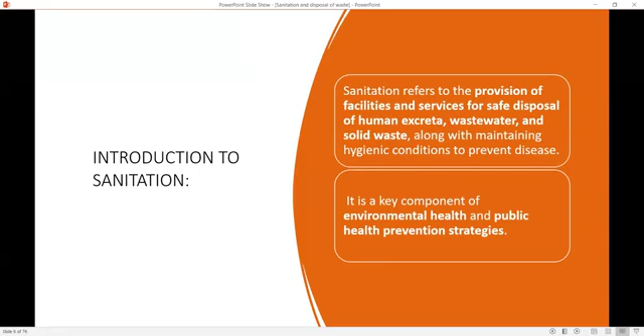Introduction to sanitation. Sanitation refers to the provision of facilities and services for safe disposal of human excreta, wastewater, and solid waste, along with maintaining hygienic conditions to prevent diseases. It is a key component of environmental health and public health prevention strategies.

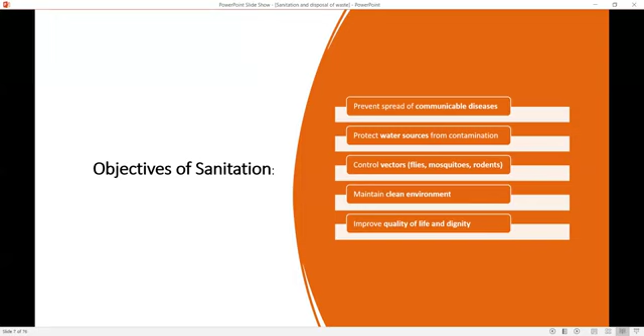Objectives: prevent spread of communicable diseases, protect water source from contamination, control vectors like flies, mosquitoes, rodents, maintain clean environment, and improve quality of life and dignity.

Next is solid waste and definition. Solid waste refers to any unwanted product in our environment or from our daily items that is not a liquid or a gas. Solid waste, on improper disposal, affects the environment in many ways, such as pollution in air, water, soil, and blocking water drains.

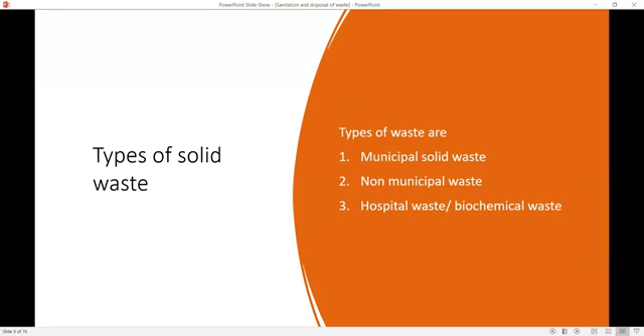It can spread disease like dysentery, cholera, and vector-borne diseases such as malaria and dengue. Types of solid waste are municipal solid waste, non-municipal solid waste, and hospital waste or biochemical waste.

Municipal solid waste includes all the items from the home and business that people no longer have any use for. These wastes are commonly called trash or garbage and include items such as food, paper, plastic, textile, leather, wood, glass, metal, sanitary waste in septic tank, and other wastes.

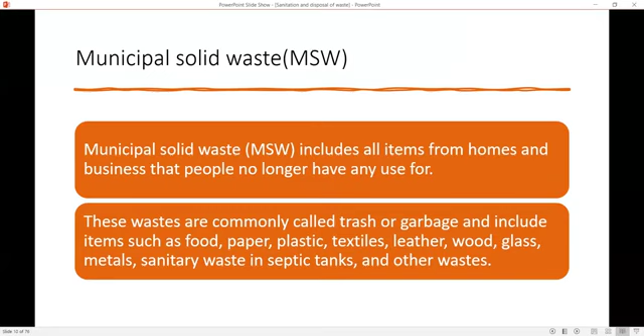Municipal solid waste includes street waste, sanitation waste, construction and demolition debris, agriculture waste, institutional and commercial waste, and household waste. So the composition of municipal solid waste includes metal, which is 9.5%,

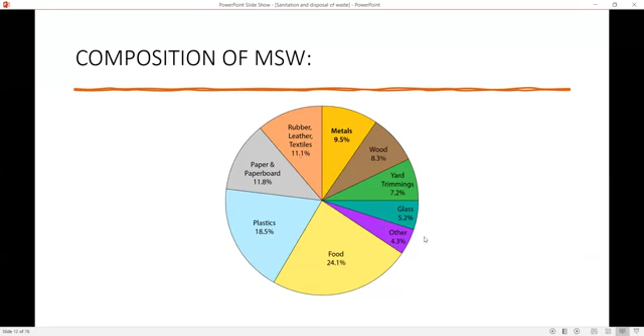wood 8.3%, yard trimming 7.2%, glass 5.2%, food 24.1%, plastic 18.5%, paper and paperboard 11.8%, rubber/leather/textile 11.1%, and others 4.3%. Next is non-municipal solid waste.

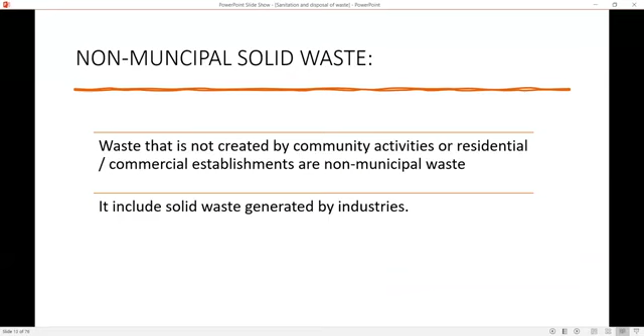Waste that is not created by community activities or residential/commercial establishments is non-municipal waste. It includes solid waste generated by industries.

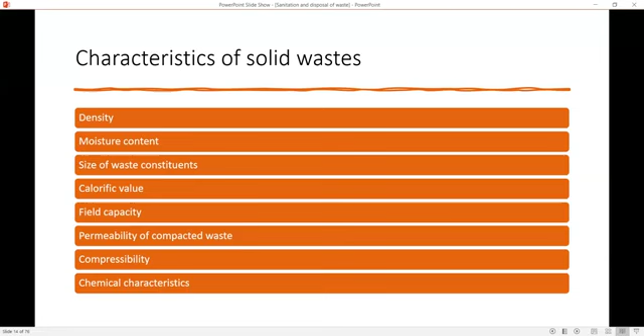Next are the characteristics of solid waste, which are density, moisture content, size of waste constituents, calorific value, field capacity, permeability of compacted waste, compressibility, and chemical characteristics.

Next is hospital waste or biochemical waste. Hospital waste is generated during the diagnosis, treatment, and immunization of human beings or animals. It includes waste like sharps, soiled waste, disposables, discarded medicine, and chemical waste.

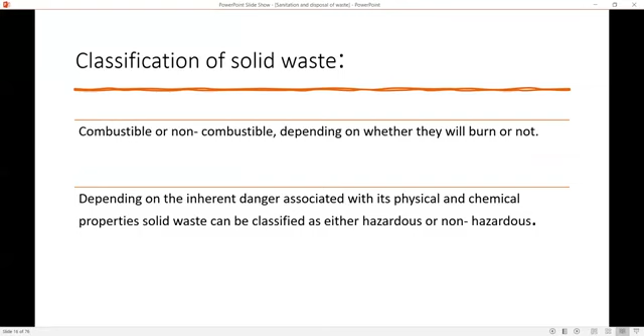Next is the classification of solid waste, which is combustible or non-combustible, depending on whether they are burned or not. Depending on the inherent danger associated with its physical and chemical properties, solid waste can also be classified as either hazardous or non-hazardous. Next are the methods of waste disposal, which are landfill, incineration, waste compaction, biogas generation, composting, and vermicomposting.

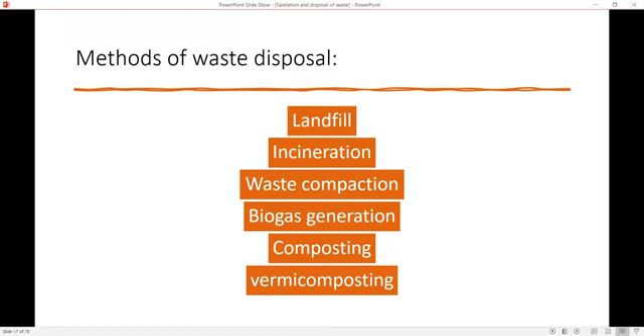This is a diagram showing the different methods. Composting is 5.5%, incineration 11.1%, controlled landfill 3.7%, landfill is 25.2%, sanitary landfill is 7.7%, open dump 33%, recycling 13.5%.

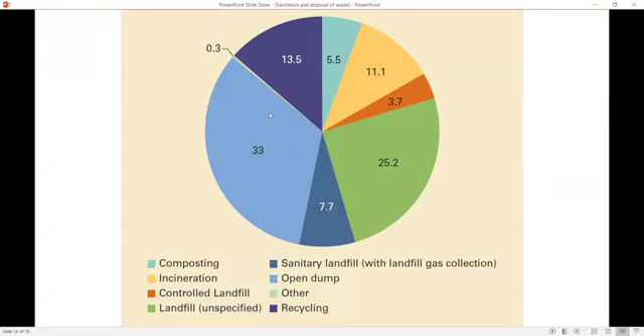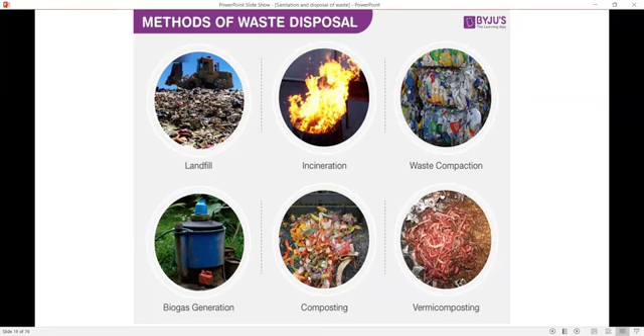So these are the methods: landfill, incineration, waste compaction, biogas generation, composting, and vermicomposting. So we will discuss this one by one.

First is landfill. In this process, the waste that cannot be reused or recycled is separated out and spread as a thin layer in the low-lying areas across the city. A layer of soil is added after each layer of garbage.

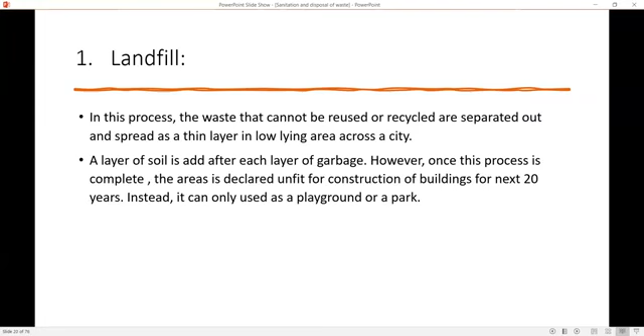However, once this process is complete, the area is declared unfit for construction of building for the next 20 years. Instead, it can only be used as a playground or a park.

Second is incineration. It involves controlled combustion of waste at a high temperature, converting waste into ash, gases, and heat, significantly reducing volume and weight. It is particularly useful for infectious waste, hospital waste, and hazardous material.

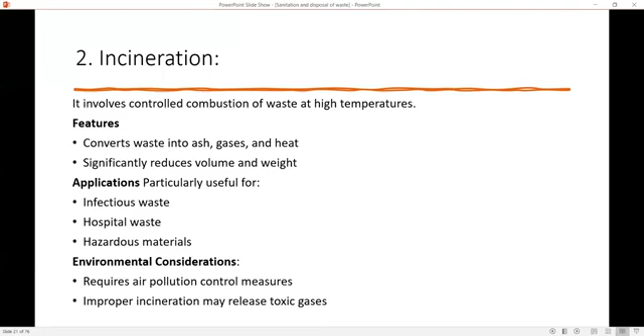Environmental considerations require air pollution control measures. Improper incineration may cause release of toxic gases. This process reduces the volume of waste by 90% and is considered one of the most hygienic methods of waste disposal.

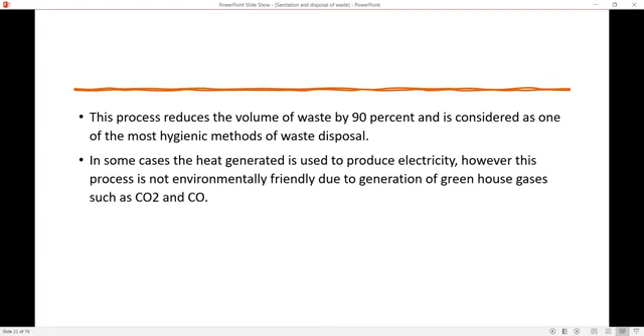In some cases, the heat generated is used to produce electricity. However, this process is not environmentally friendly due to the generation of greenhouse gases such as carbon dioxide and carbon monoxide. Next is waste compaction.

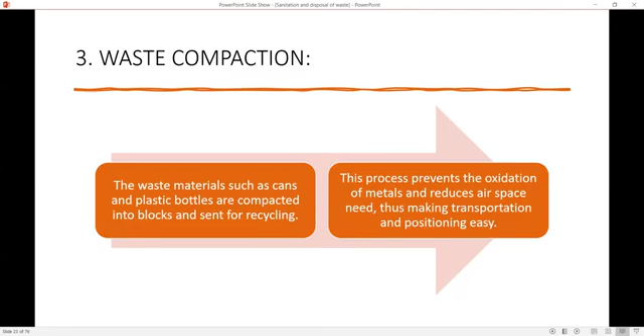Waste materials such as cans and plastic bottles are compacted into blocks and sent for recycling. This process prevents the oxidation of metals and reduces airspace needed, thus making transportation and positioning easy.

Number four is biogas generation. Biodegradable waste is the type of waste originating from plant and animal sources, which may be degraded by other living organisms.

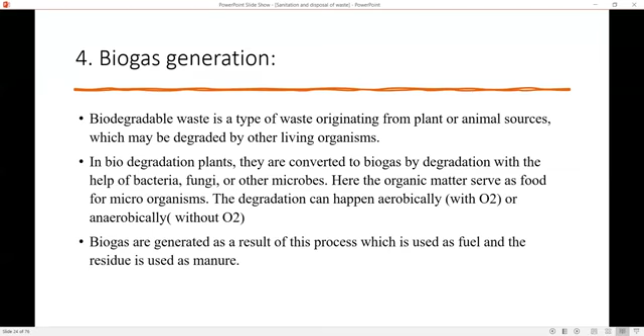In biodegradation plants, waste is converted into biogas through degradation with the help of bacteria, fungi, and other microbes. Here, organic matter serves as food for microorganisms. The degradation can happen aerobically, with oxygen, or anaerobically, without oxygen. Biogas is generated as a result of the process, which is used as fuel, and the residue is used as manure.

Next is composting. Composting is a natural process of rotting or decomposition of organic matter by microorganisms under controlled conditions. Raw organic materials such as crop residue, animal waste, food garbage, some municipal waste, and suitable industrial waste enhance its suitability for application to soil as a fertilizing resource after undergoing composting.

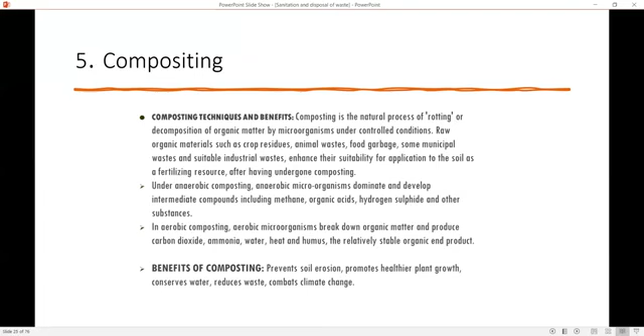Under anaerobic composting, anaerobic microorganisms dominate and develop intermediate compounds including methane, organic acid, hydrogen sulfide, and other substances. In aerobic composting, aerobic microorganisms break down organic matter and produce carbon dioxide, ammonia, water, heat, humus, and other stable organic end products. The benefits of composting are preventing soil erosion, promoting healthier plant growth, conserving water, reducing waste, and combating climate change.

Next is vermicomposting. Vermicomposting is the process of using worms for degradation of organic matter into nutrient-rich manure. Worms consume and digest the organic matter. The byproduct of the digestion, which is excreted out of the worm, makes the soil nutrient-rich, thus enhancing the growth of fungus and bacteria. It is also far more effective than traditional composting.

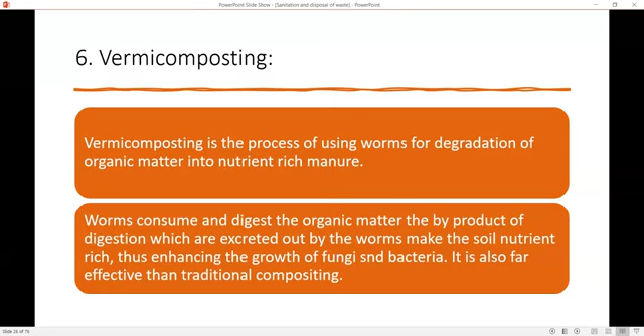Next is solid waste management. The term solid waste management mainly refers to the complete process of collecting, treating, and disposing of solid waste. In the waste management process, waste is collected from different sources and disposed of. This process includes collection, transportation, treatment, analysis, and disposal of waste.

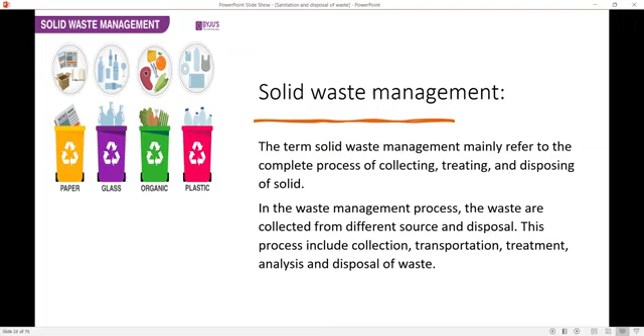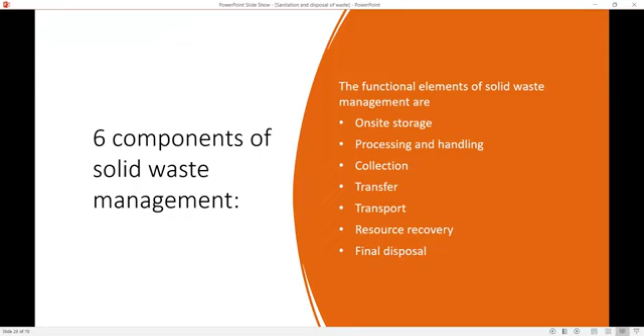Next are the components of solid waste management. The functional elements of solid waste management are on-site storage, processing and handling, collection, transfer, transportation, resource recovery, and final disposal. This image shows the process: collection, transportation, and then recovery, processing, and disposal.

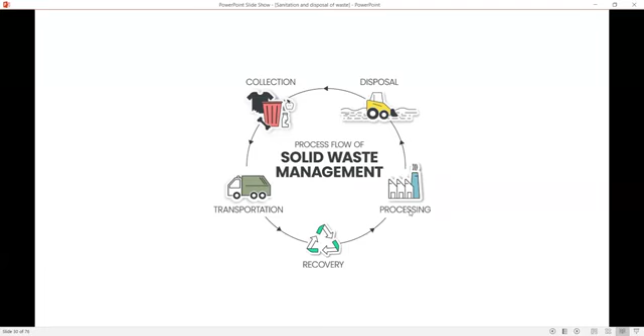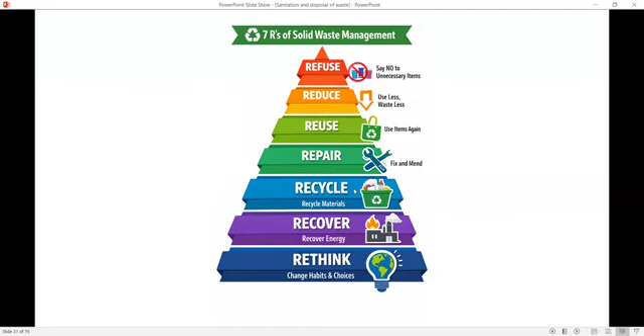The 7 R's of solid waste management are: refuse - say no to unnecessary items; reduce - use less, waste less; reuse - use items again; repair - fix and mend; recycle - recycle materials; recover; and rethink.

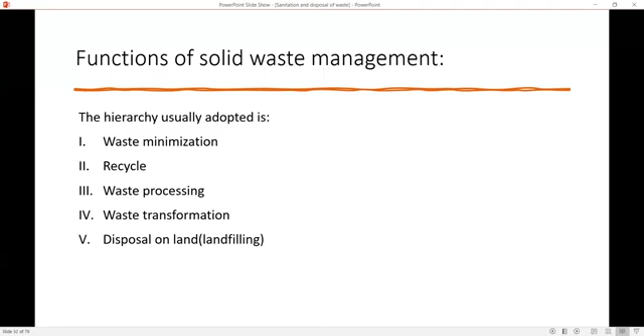Next is integrated solid waste management. Integrated solid waste management is a comprehensive framework that manages municipal solid waste by combining source reduction, recycling, composting, and safe disposal to maximize efficiency and minimize environmental impact. It promotes sustainability by prioritizing waste prevention, resource recovery, and reduction of pollutants.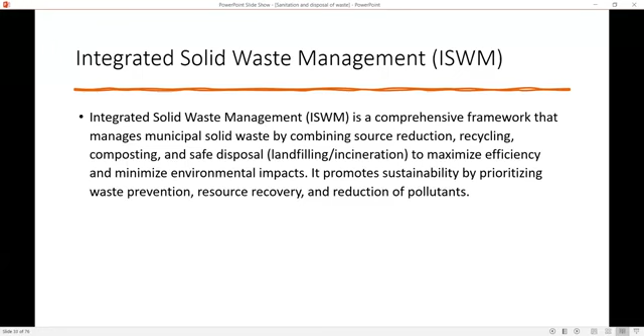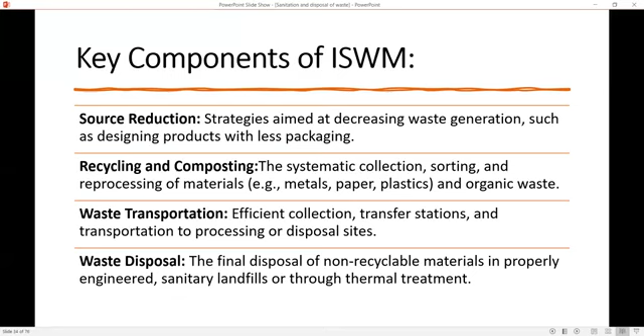The key components of integrated waste management are: strategies aimed at decreasing waste generation, such as designing products with less packaging, recycling and composting; systematic collection, sorting, and reprocessing of materials, for example metal, paper, plastic, and organic waste; waste transportation, which is efficient collection and transportation to processing or disposal sites; and waste disposal, the final disposal of non-recyclable material in a properly engineered sanitary landfill or through thermal treatment.

Challenges include lack of infrastructure, lack of human resources, insufficient budget for solid waste management, limitation of technology, lack of participation in waste segregation at the source due to low awareness, low waste collection fee, and institutional and policy issues for solid waste management. Lack of infrastructure includes inadequate sewerage systems in rural and peri-urban areas, absence of proper drainage network, poorly constructed and non-functional toilets, and limited wastewater treatment plants.

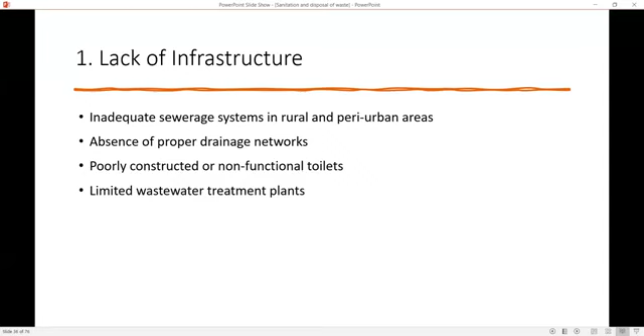Open defecation practices are still common in rural communities due to poverty, cultural habits, and lack of toilets, leading to contamination of soil and water, which is a major barrier to achieving SDG 6.

Financial constraints include high cost of building sanitation systems, limited government budget allocation, low household income for toilet construction, and dependence on external funding such as NGOs.

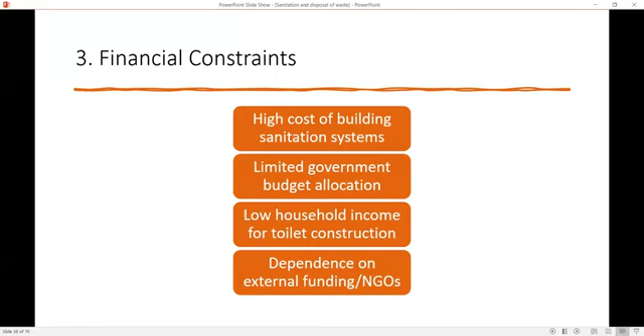Poor waste management system: irregular garbage collection, open dumping of solid waste, lack of segregation of biomedical, domestic and industrial waste, and burning of waste causing air pollution.

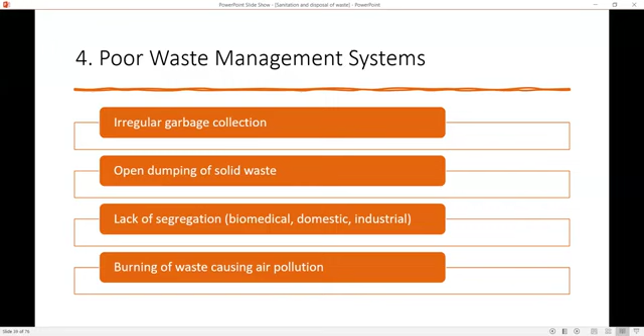Water contamination: mixing of sewage with drinking water, pipeline leakage at old pipes, and unsafe disposal of wastewater leads to outbreaks of diarrhea, typhoid, and hepatitis A.

Population growth and urbanization: rapid urbanization, migration, overcrowding, slums, overburdened municipal systems, and unplanned settlements without sanitation services. Lack of awareness and education includes poor understanding of hygiene practices, low hand washing compliance, misconceptions about disease transmission, and weak health education programs.

Weak governance and policy implementation, poor enforcement of sanitation law, corruption and mismanagement of funds, lack of coordination between departments, and inefficient monitoring systems are key challenges. Next is the cultural and behavioral barriers, which include resistance to toilet use in some communities, gender-based restrictions in accessing sanitation facilities, and social acceptance of open defecation in certain areas.

Environmental challenges include flood damage to sanitation systems, climate change increasing contamination risk, groundwater pollution, and poor drainage causing stagnant water.

Solid waste management is essential for achieving the Sustainable Development Goals, including SDG 11, sustainable cities and communities, which focuses on reducing the environmental impact of waste generation in urban areas, ensuring cities are sustainable, resilient, and clean. SDG 12, responsible consumption and production, aims to sustainably reduce waste generation by 2030 through prevention, reduction, recycling, and reuse.

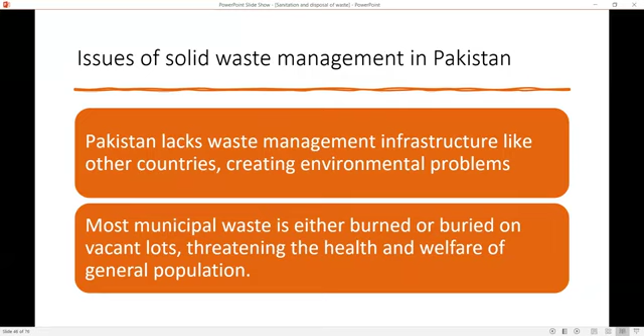Issues of solid waste management in Pakistan: Pakistan lacks waste management infrastructure like other countries, creating environmental problems. Most municipal waste is either burned or buried on vacant lots, threatening the life, health, and welfare of the general population. This is a diagram showing the solid waste management situation in the urban areas of Pakistan.

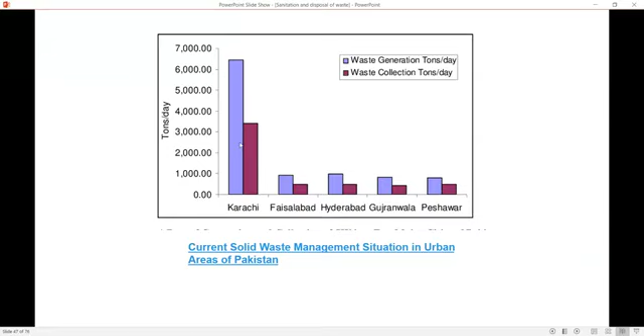This purple line shows waste generation, and this shows waste collection, which is less than waste generation, for Karachi, Faisalabad, Hyderabad, Gujranwala, and Peshawar.

Strategies for reducing greenhouse gas emissions from municipal solid waste management in Pakistan.

Next is Chief Minister Maryam Nawaz Sharif. Her Suthra Punjab, Clean Punjab initiative marks Pakistan's largest province-wide sanitation and waste management program. It presents a significant step toward environmental sustainability and public health improvement in Punjab. The campaign aimed to achieve zero waste in Punjab within 3 months, encompassing both urban and rural areas.

The impact of Suthra Punjab includes cleaner streets, cities, towns and villages, restoration of public gathering spaces, improved air quality, healthier living conditions, enhanced living standards, positive impact on tourism, and generation of employment opportunities.

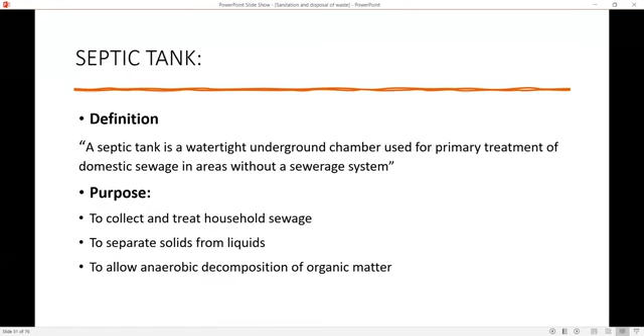Next is the septic tank. A septic tank is a watertight underground chamber used for the primary treatment of domestic sewage in areas without a sewerage system. Its purpose is to collect and treat household sewage, to separate solids from the liquid, and to allow anaerobic decomposition of organic matter.

The structure of the septic tank includes an inlet pipe which brings sewage into the tank chamber where treatment occurs. A partition wall divides the tank into two compartments. An outlet pipe carries the effluent out. A vent pipe releases gases like methane and H2S, and a manhole allows for cleaning and inspection.

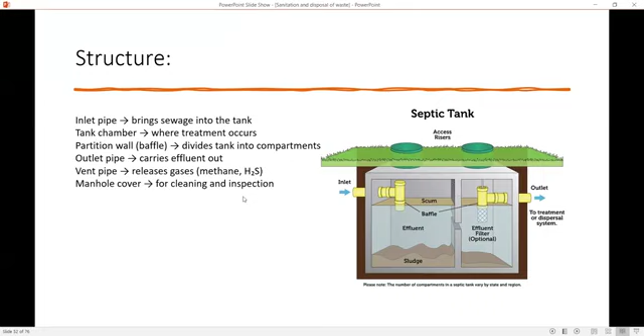The common types of septic systems are gravity, pressure distribution, sand filter, and mound system.

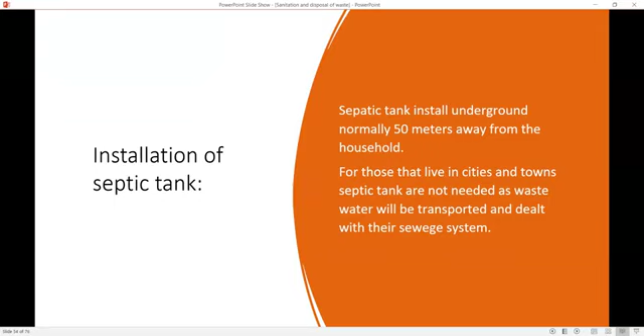Installation of septic tank: septic tanks are installed underground, normally some distance away from the household. For those living in cities and towns, septic tanks are not needed as the wastewater will be transported and dealt with by their sewage system.

The functioning of the septic tank: step one is sedimentation, where heavy solids settle at the bottom, called sludge, while light material like oil and grease float, called scum. Second step is anaerobic digestion, in which bacteria break down organic matter and produce gases like methane, carbon dioxide, and H2S. Third step is effluent discharge, where partially treated liquid flows out and goes to a soak pit and drain field for further purification.

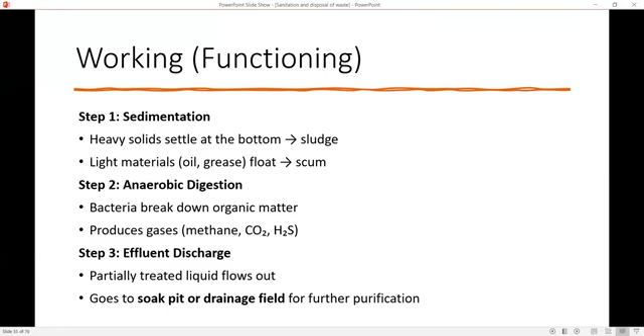Layers in the septic tank: the top layer is the scum, the middle layer is the clear liquid effluent, and the bottom is the sludge layer.

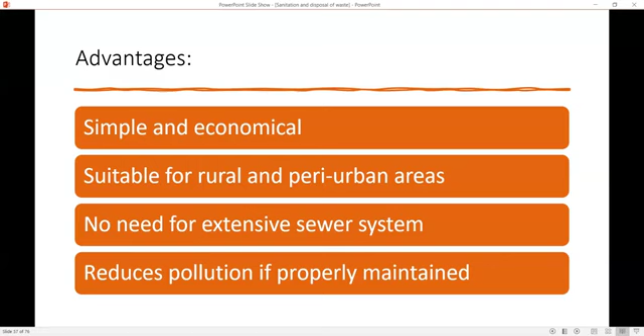Advantages of the septic tank: it is simple and economical, suitable for rural and peri-urban areas, requires no extensive sewer system, and reduces pollution if properly maintained.

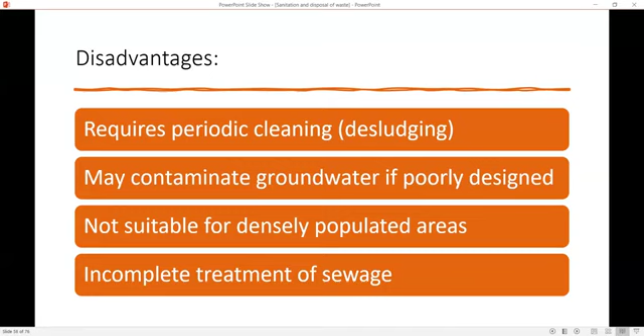The disadvantages of septic tanks are that they require regular cleaning, may contaminate groundwater if poorly designed, are not suitable for densely populated areas, and provide incomplete treatment of sewage. Maintenance requires regular desludging every 2 to 3 years, avoiding disposal of non-biodegradable waste, and ensuring proper ventilation.

Recent updates: the solid waste management sector in Pakistan has a refined roadmap for policymakers. Pakistan could strengthen its solid waste management and, in doing so, reduce its greenhouse gas emissions. It provides guidance on improving and expanding waste collection and disposal services for municipal, industrial, electronic, and hospital waste.

It outlined the waste management options and key considerations in setting up a waste management system.

Next is the National Waste Management Strategy. Pakistan does not yet have a single unified solid waste policy, but waste management is guided by the National Hazardous Waste Policy 2022, National Environmental Policy, National Sanitation Policy, and Provincial Waste Management Rules. The 2022 policy acts as the umbrella framework for waste management, especially hazardous waste. Objectives of the national strategy include prevention, reduction of waste generation, environmentally safe handling and disposal, protection of public health and environment, and compliance with international conventions.

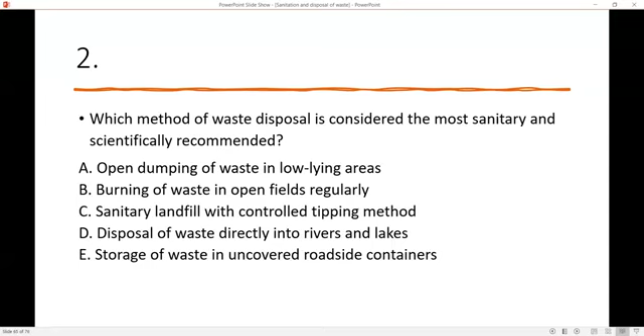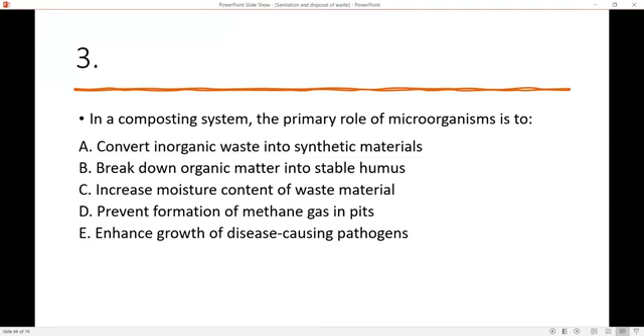B. Yes, B is the right option.

MCQ number four. Which of the following waste disposal methods is most suitable for infectious hospital waste? A. Open dumping in municipal landfill areas. B. Composting with domestic biodegradable waste. C. Controlled incineration at high temperature. D. Disposal into the sewage system without treatment. E. Burial in a shallow pit near residential areas.

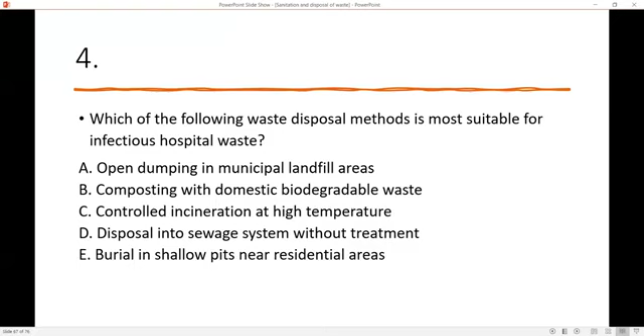C. Yes, C is the right option. Controlled incineration at high temperature.

MCQ number five. Which of the following is not a function of solid waste management? A. Collection of waste from various sources regularly. B. Segregation of waste into different categories. C. Transportation of waste to disposal safely. D. Promotion of open dumping for quick disposal. E. Treatment and final disposal of waste scientifically.

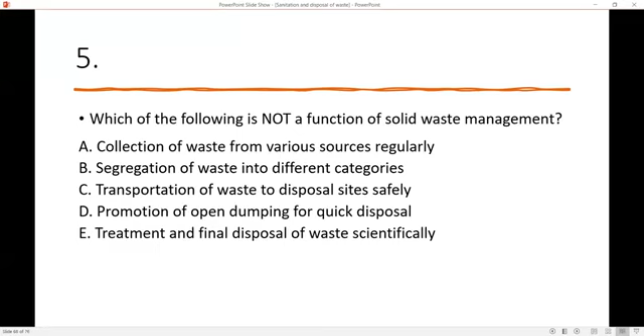D. Yes, D is the right option.

MCQ number six. A rural village reports frequent diarrheal outbreaks. Investigation shows waste is dumped near a shallow well used for drinking water. The most appropriate intervention is: A. Promote open burning of waste near the water source. B. Shift waste disposal to a sanitary landfill away from the well. C. Increase use of chemical fertilizer in agriculture. D. Encourage storage of waste inside the household longer. E. Discharge liquid waste directly into the same well.

B. Yes, B is the right option.

MCQ number seven. A septic tank is not desludged for many years. The most likely consequence is: A. Increased efficiency of anaerobic digestion process. B. Overflow of untreated sewage into the surroundings. C. Complete sterilization of pathogens inside the tank. D. Conversion of sludge into high quality compost. E. Reduction in gas production due to inactivity.

B. Yes, B is the right option.

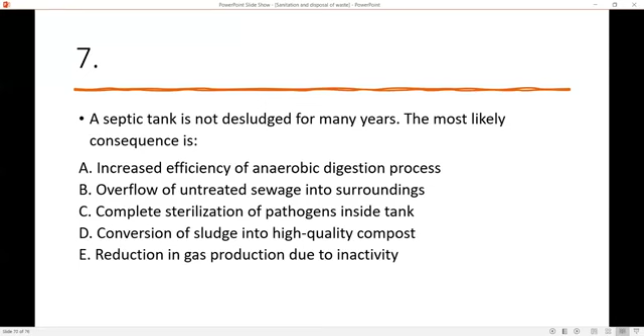MCQ number eight. Which of the following best represents sustainable waste management? A. Increased waste production with rapid disposal methods. B. Open dumping combined with periodic burning practices. C. Reduce, reuse, recycle with resource recovery approach. D. Disposal of all waste into rivers and water bodies. E. Storage of waste without treatment for long duration.

C is the right option. Reduce, reuse, recycle with the resource recovery approach.

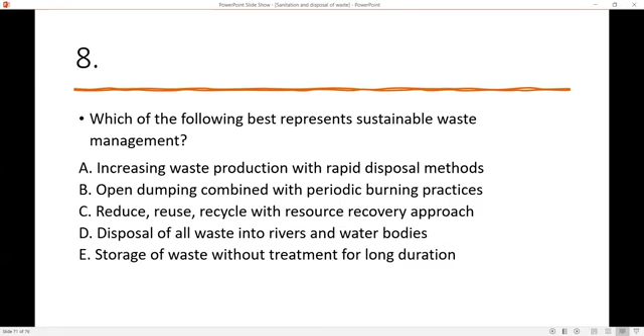MCQ number nine. A septic tank mainly functions by: A. Aerobic oxidation of sewage using oxygen supply. B. Chemical disinfection of pathogens in the wastewater. C. Anaerobic digestion of organic matter in the sewage. D. Filtration of solid waste through a sand layer. E. Evaporation of liquid waste under sunlight.

C. Yes, C is the right option.

MCQ number ten. The concept of 3R in waste management includes: A. Remove, replace, restore material efficiently. B. Reduce, reuse, recycle waste product efficiently and effectively. C. React, reform, reconstruct environmental system. D. Repair, rebuild, reorganize waste structure. E. Recover, reproduce, reinvest waste material.

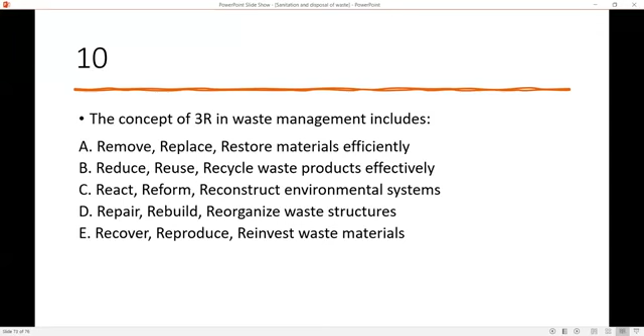B. Yes, B is the right option. This is the MCQs key.